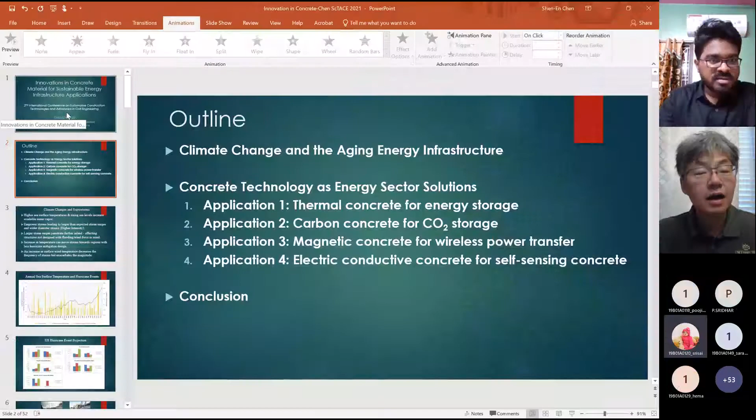I'm going to discuss some innovations in concrete material for energy infrastructure application. My inspiration for this conversation is really based upon my background in hurricane investigation, especially pertaining to some of the things that we've seen during the past 30 years on climate change, and also related to energy infrastructure responses. So I will be talking about what concrete technology we can apply to the energy sector. I will show 4 different applications, and then I'll conclude my presentation.

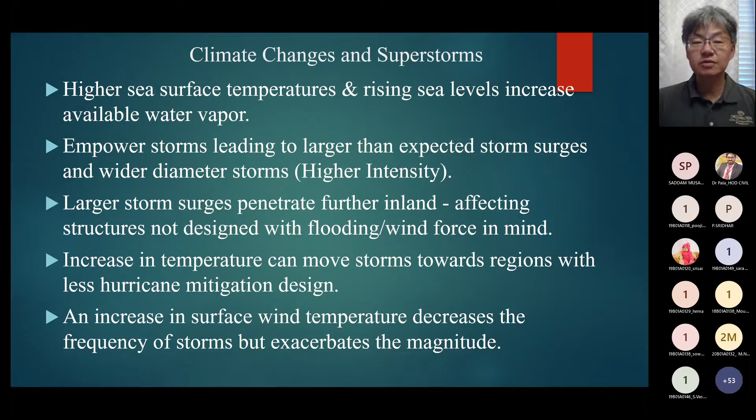One of the key results of climate change is extreme storm events, what we call superstorms. This is due to higher sea surface temperature and rising sea levels. As a result, there is an increase of the amount of water vapor in the air, which indicates that it will need more energy to move this amount of water vapor. And as a result, there will be bigger storms, with wider storm areas, higher intensities, and stronger storm surge, such as flooding of the coastal areas and wave actions. And these results would directly impact the structural design for all coastal and inland structures. And we have seen many of those examples.

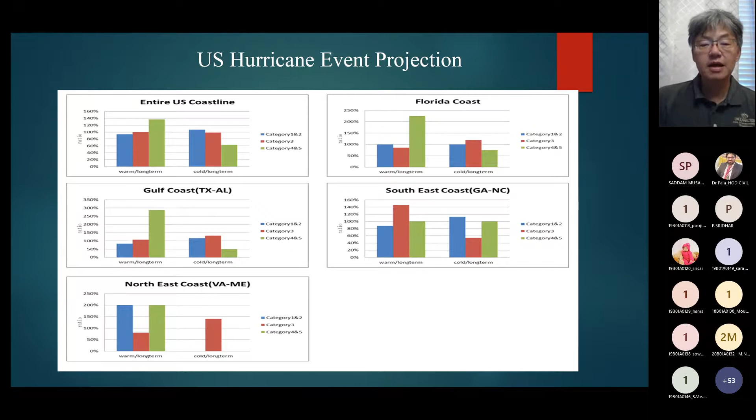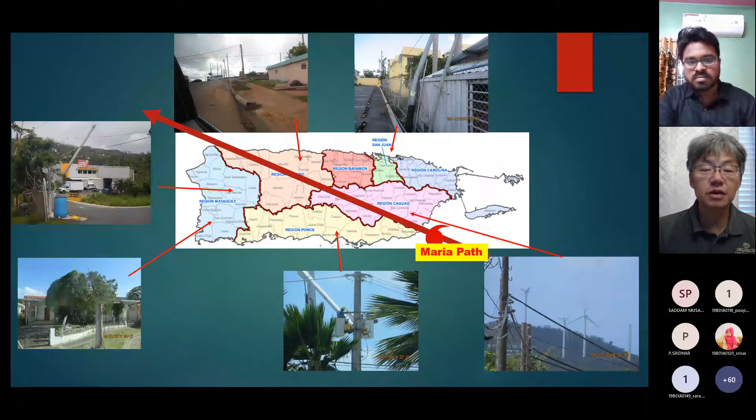The tropical storm that made landfall in Puerto Rico had 185 miles per hour wind. At such a high wind speed, the island was not prepared, so the entire island lost its power. What we have observed is a lot of critical energy infrastructure collapse, including substations, wind turbines, as well as different transmission structures. And here are several pole-shaped structural failures. As a result, as I mentioned, almost the entire island lost power.

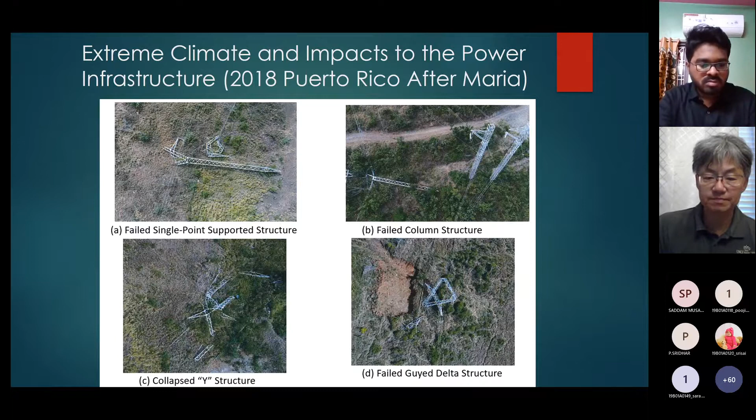Another inspiration for this study is really the use of concrete technology. So concrete is the most widely used construction material in the world. However, much of that concrete is aging, especially for the energy infrastructure. And so there is a new question about how we can improve on the concrete technology so that we can enhance the performance of those aging infrastructures.

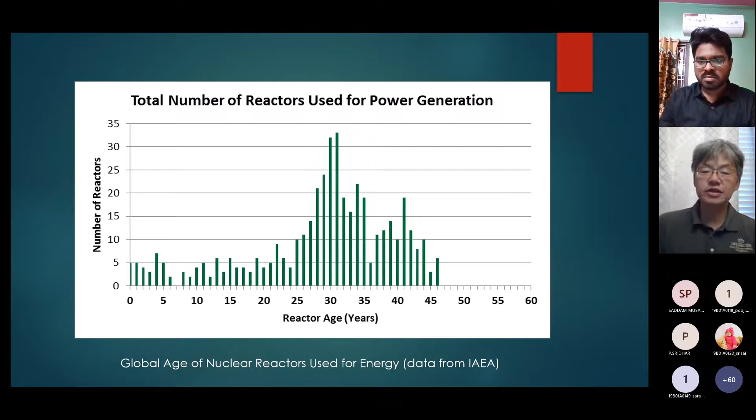This shows you the nuclear reactors used globally and their relative age. And this is a little older data; this was published in 2010. So all these ages will have to be pushed 10 years further. Again, it's an indication of the aging infrastructure. So we are asking the question, what can we do to improve the climate using concrete?

Now, concrete technology historically only applied to building structures. Okay, so even though we have high strength concrete, we have concrete with waste materials, the key is still focused on the building science. In this talk, we want to look at a totally different way of using concrete. So here I'm going to give you 4 examples.

First one is, can we use concrete for thermal energy storage? Okay, so when we have a storage capacity, then we are able to use renewable energy. Okay, so that would be one way to help the climate by transitioning from fossil energy use to using renewables, which are not storable at this point.

And the second technique that I'm going to present is, can we use concrete to absorb CO2 so that we can actively reduce the amount of carbon dioxide in the air, which would be helpful to the greenhouse gas problem. And then the next one is, can we modify concrete so that we can enhance wireless power transfer, which would help to promote electric vehicles?

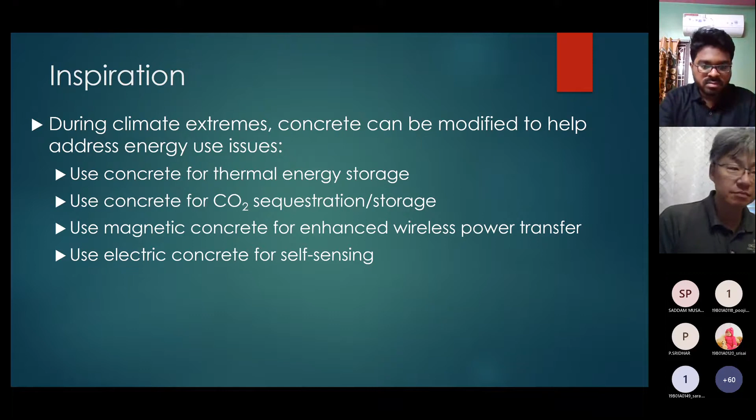Okay, so electric vehicles run on batteries and they don't have an emission problem, which is one of the best. They may still be dependent on fossil energy through the energy production. However, we can remove the emission problem away from the urban scenario, and hopefully that would help with, again, the climate issue. And lastly is to develop self-sensing concrete, which will make concrete more efficient as both building technology as well as energy storage technology. So those are the 4 examples I will present.

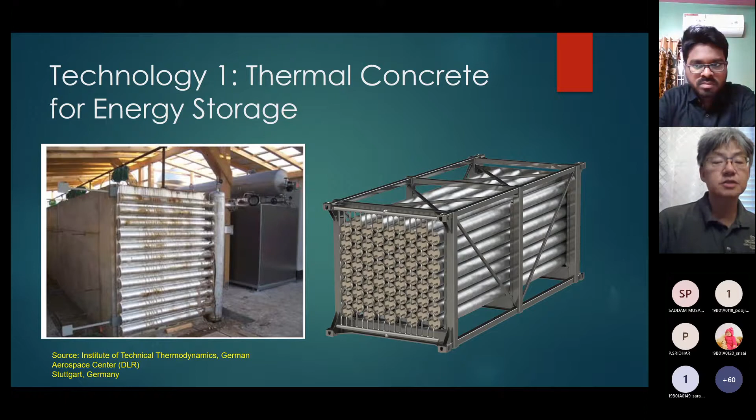So the first technology we'll present is the thermal concrete for energy storage. So mass concrete has a lot of material that, if we can heat it up, would store the energy that way. And here is a typical application where water is being used to transfer heat from building applications to those concrete masses. And so this is a technology that is growing in application.

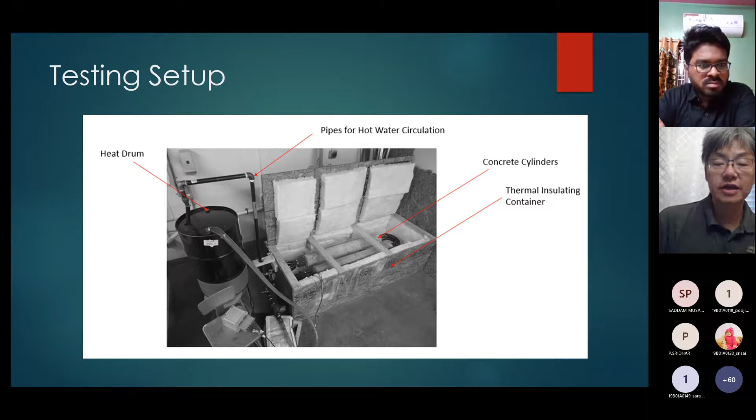We also use monitoring techniques such as thermocouples and electrodes, which make the concrete self-sensing. Okay, so I will talk about self-sensing at the end of the lecture, but this is where we are demonstrating this technology.

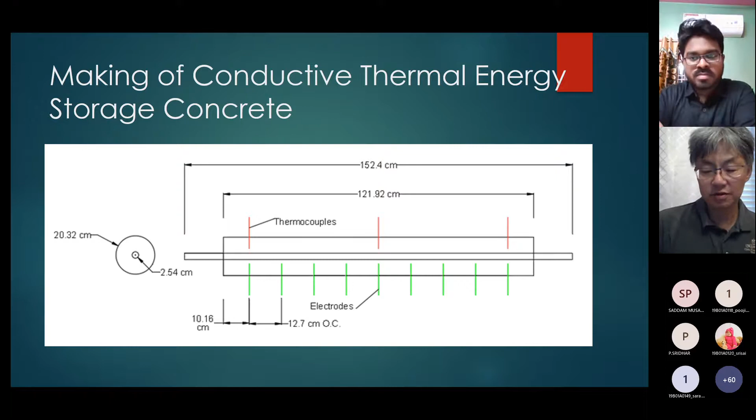Here is the concrete specimen that we put several sensors on, and then you can see when hot water goes through the cylinders, it heats up the material, and then we typically do the test by stopping the water flow so that the material can have its natural cooling down, so that we can quantify the conductivity of heat through the process. And this shows you the result of finite element and actual temperature increase during the heat-up process. So you can see that they match very well.

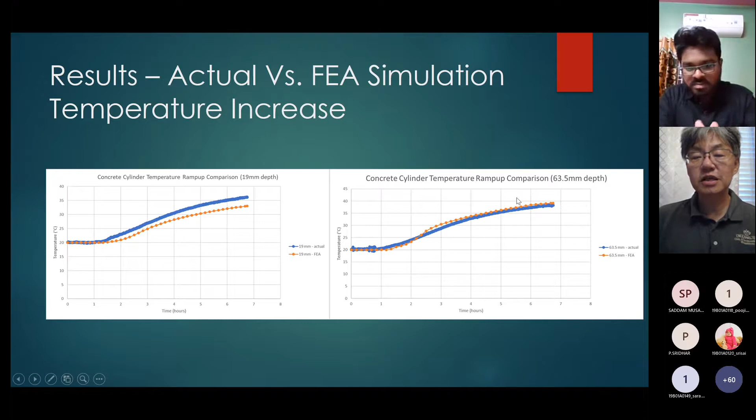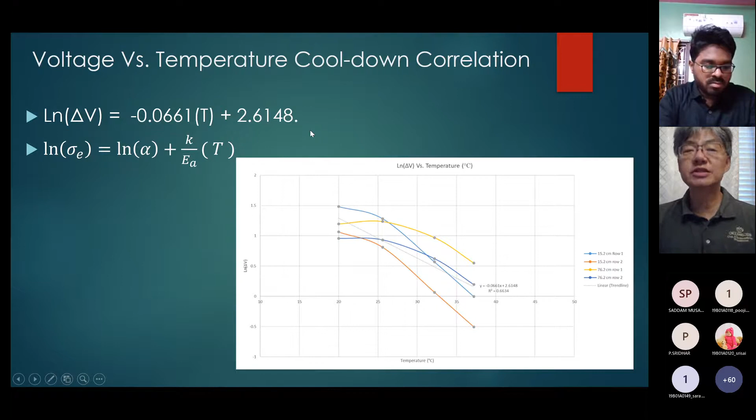So this is an inverse method of determining the heat conductivity of the concrete material. And this is a voltage. So we are using electrodes to measure the voltage drop during temperature cool down. And you can see that there is almost linear correlation with the cool down process, which can help us to develop correlations that can be used for the design of such technology.

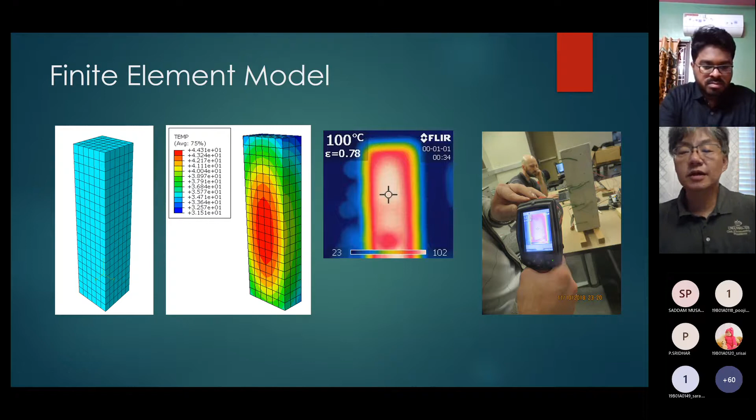To understand further how concrete material reacts to thermal effect, which is a multi-physical phenomenon, we use the electric self-sensing technique and the thermal measurement method on concrete specimens, which are built in the beam shape. And this is finite element and infrared imaging of the same specimen. So we can see there is a direct correlation between the theoretical model and the actual experiment.

And again, we demonstrate that both voltage and current can be correlated to the temperature change. And because voltage and current are the two sides of the equation, which directly relates to the resistivity of the material, we can also measure the resistivity as a function of the thermal property for those kinds of concrete. And the next application is CO2 storage through mineral carbonation.

So mineral carbonation is a natural weathering process of rock, especially rock with a high content of magnesium, iron, and calcium. And in literature, we have seen people propose to use olivine and serpentine as the potential feedstock for mineral carbonation so that we can reduce the greenhouse gas in the atmosphere. And the typical measure is if you have 2 tons of silicate mineral, then you can capture 1 ton of CO2.

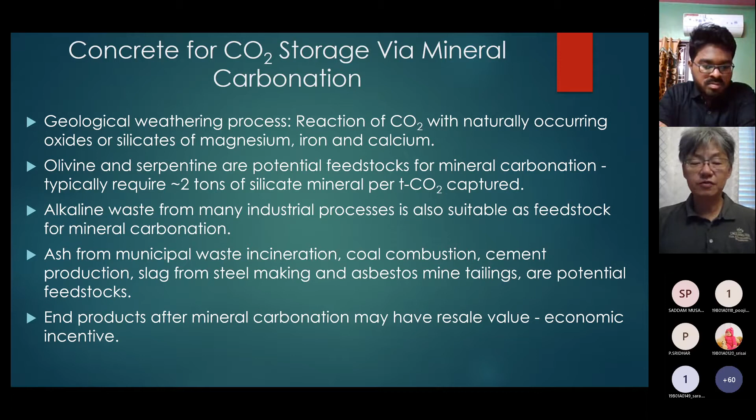And there are other industrial processes resulting in alkaline-based waste, which are also valuable feedstock for mineral carbonation. And then there are other waste materials such as incineration outputs, especially slags, and cement productions are potential feedstocks. And so we have imagined if we can use cement to increase the carbonation, then we can make concrete into a natural CO2-absorbing material so that it will clean up the air naturally. And this shows one of the techniques to increase the surface area for absorption is by making porous concrete.

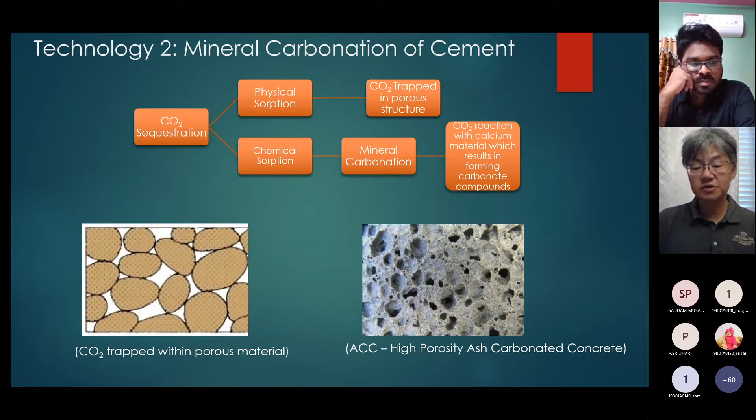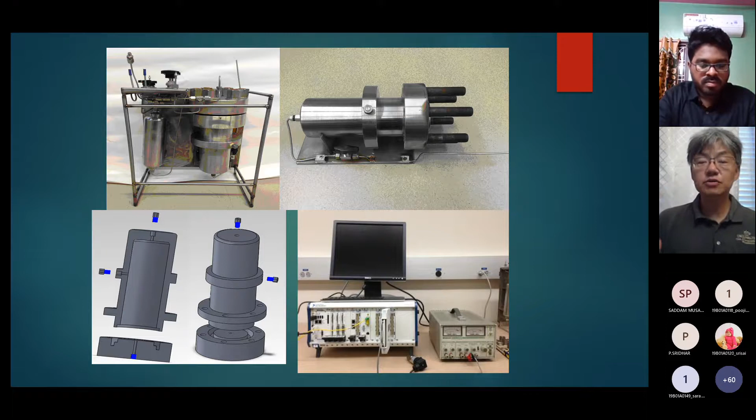And so to study such a thing, we had to come up with our own carbon absorption test device. So this is a schematic drawing of what we call the CTF PRC test chamber for absorption test. And the goal is to quantify how much CO2 we can absorb in different cement mix designs. And this is the actual device that we fabricated in our laboratory, which shows you a very high pressure chamber that we can apply high pressure CO2 into. And by monitoring the pressure drop, we can actually quantify the amount of volumetric loss of CO2 in the material mix.

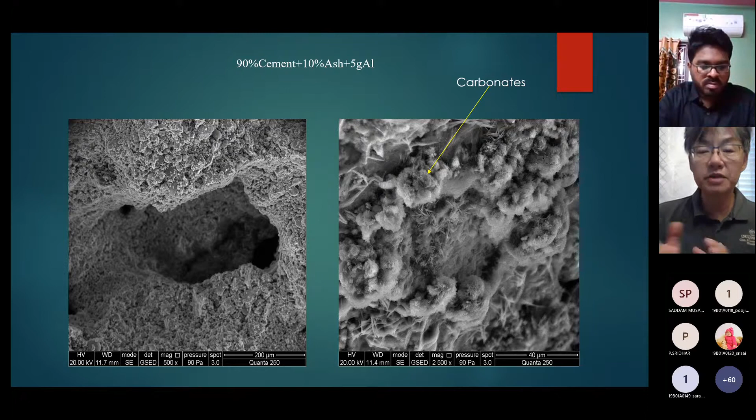And this is the outcome. This is the microscopic image of the carbonated concrete showing the actual carbonates that are being formed. And so this is the physical evidence that carbon concrete is able to absorb CO2 and permanently remove it from the air. And through experiments, we can see that within the first few hours, a significant amount of CO2 is being absorbed quickly. Concrete continues to age for 28 days, but within the first 2 days, over 15% of the CO2 per volume of the material can be absorbed.

And this is a significant result because it shows active absorption. And we can also further differentiate between physical absorption and chemical absorption. So chemical absorption happens when the material is still wet and the chemical reactions result in the carbonation of calcium material producing calcium carbonates. And physical absorption is due to the porous volume. And so pressurization would force CO2 to further go into the pores of the material and result in the absorption process.

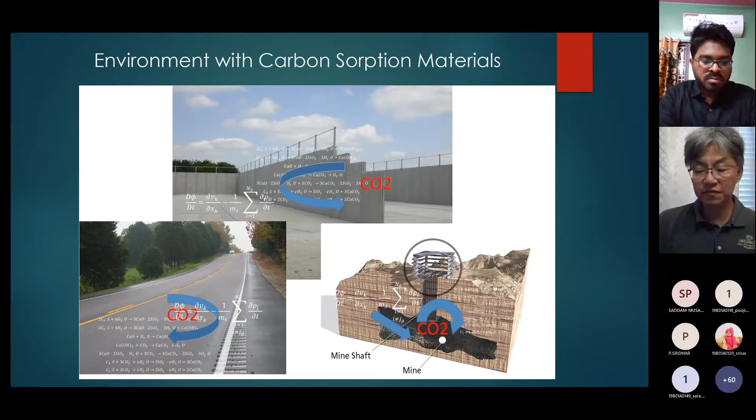What is the application? It's everywhere. It's concrete roads, concrete buildings, anywhere that you can imagine the use of concrete, you can imagine carbon absorption. So this is a really, really cool technology. And we are hoping that the world will catch on to the study of carbon concrete so that we can actively reduce CO2 in the world. The next technology we want to show for the use of concrete for climate improvement is to use magnetic concrete for wireless power transfer.

Electric vehicles are zero emission technology based on lithium ion batteries. All you have to do is charge them overnight so that you will have power to be mobilized. Wireless power charging is a cool technology because it can help reduce the actual plug-in into the system, and also it can be made dynamic so you can charge a car while it's driving.

It's based on a very simple principle that was originally developed by Tesla for wireless power charging, based upon the principle of electromagnetic field generated by two different magnetic coils. Through the interaction of the two, there is a conversion of magnetic field and induced magnetic field on the receiver side, which can transfer the electromagnetic field into electricity through the power electronics. So this coupling system makes a very efficient energy transfer technique.

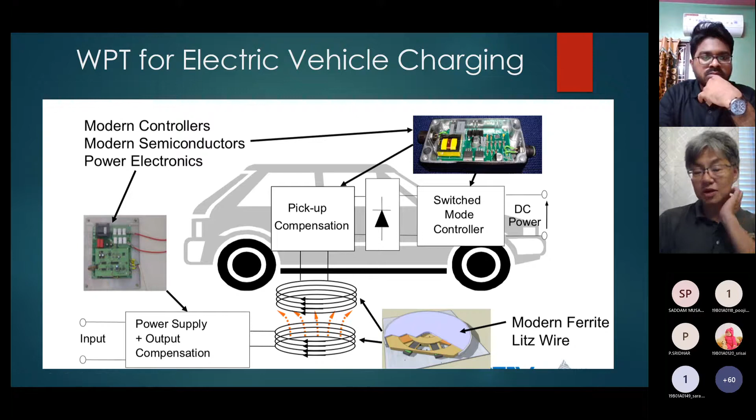This is great for EVs because you can imagine cars just parked on top of the wire. As long as the car itself has the wireless receiver on its end, the car can be charged for however long.

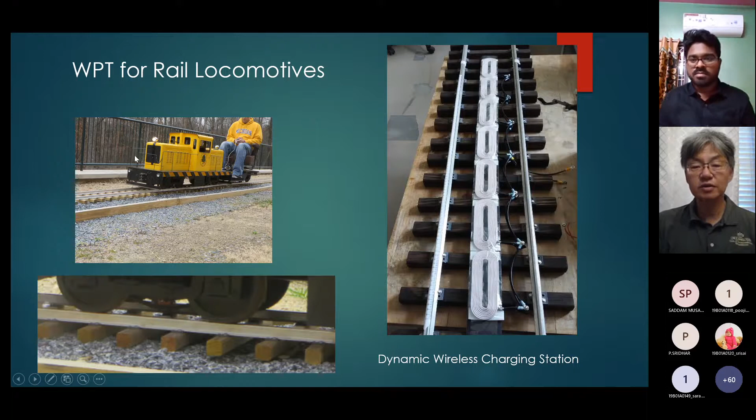This is our laboratory train. We actually have a train in our lab. It's a rideable park gauge train as seen in the top picture here. We are developing a technique that would make this train use wireless power transfer, and we have several designs. This is seen as a two coil system that can transfer electricity to this electric locomotive.

We are also developing techniques so that we can charge them dynamically. Here you see 4 transmitters and 1 receiver. The receiver is put on top of the locomotive, and using 4 transmitters, we can move the train and transfer electricity at the same time.

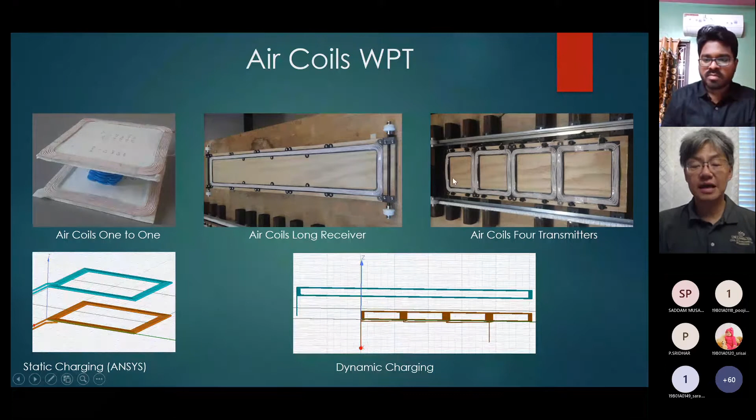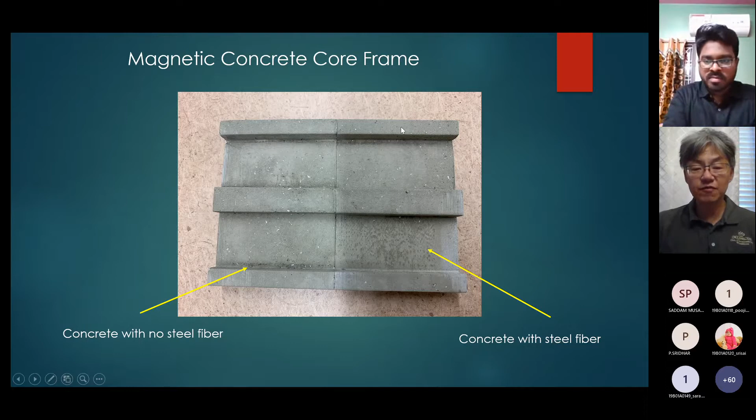Next, we're going to increase the efficiency of the power transfer by placing the coil on a concrete core material. We make the concrete core material magnetized by putting steel fibers in the concrete.

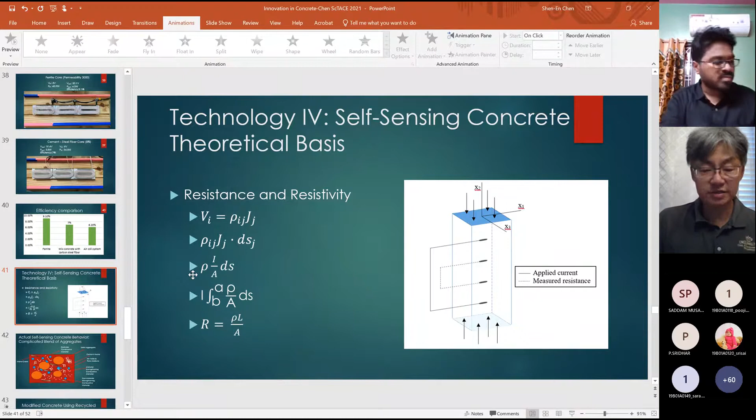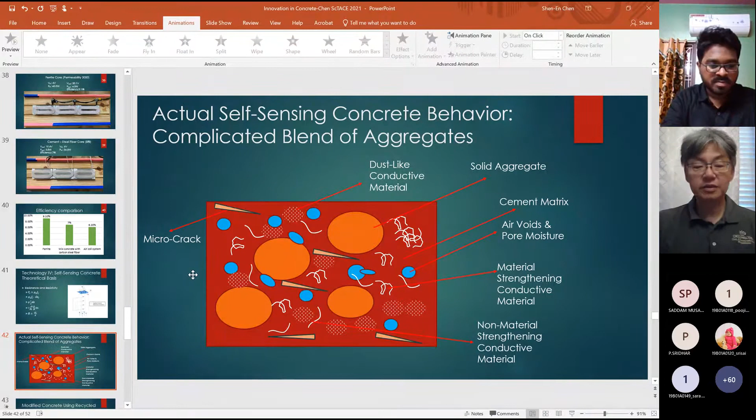We show that there is a reduction of resistivity when the concrete materials are being compressed, showing that there is a direct correlation. It is also a function of the maturity of the concrete material, so again we demonstrate the viability of such a technique.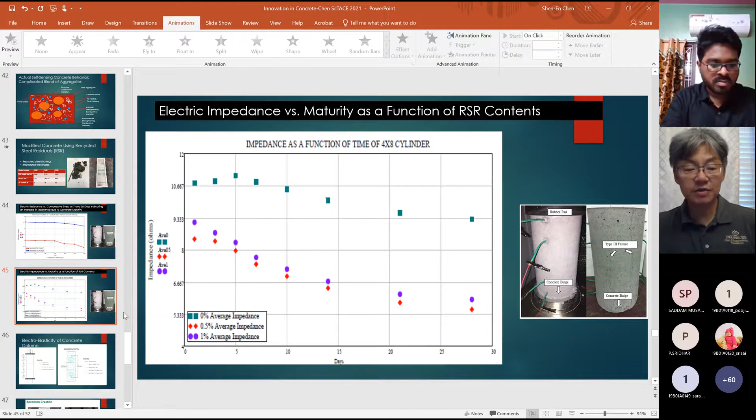Then we start testing using a load test on a concrete beam or column, in this case, where you can see that the electric current is being induced into the material. When the load is compressed, we can correlate the voltage drop versus the change in current.

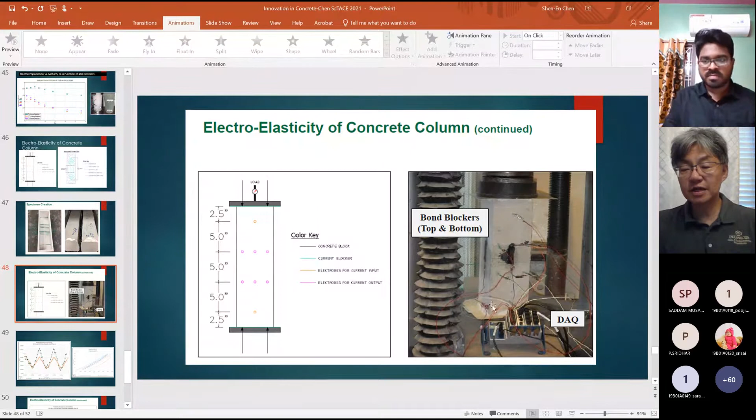Here's again the picture of the samples that are being built, and here's the load test setup. You can see that we have both strain gauge as well as voltage measurements across the specimen.

This is really the neat picture. We do loading and unloading cycles, and you can see the strain gauge and the resistivity voltage measurements are compatible, which shows us that there is a linearity in the voltage drop versus the stress-strain relationship of the material. So this shows you the stress-strain curve.

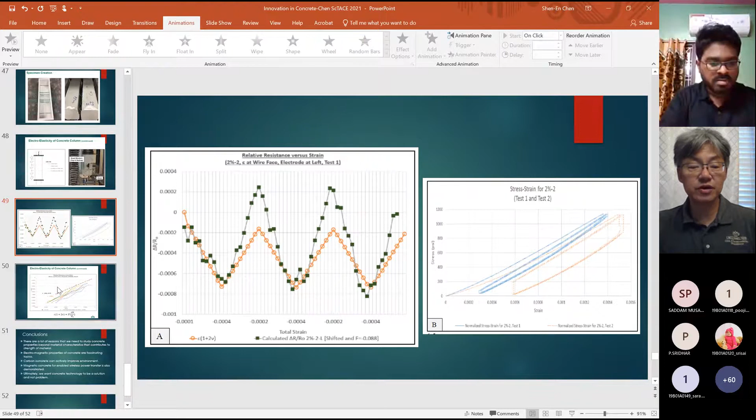Based on that, we are able to make correlations between the electric resistivity, which has to be derived, versus the strain of the material.

So in conclusion, there are a lot of reasons why we wanted to make concrete material applicable to help with climate change.

One of the reasons is because every ton of cement produced will generate about one ton of CO2 emitted into the atmosphere, because cement is produced in a kiln, so it needs to be heated, and that heating process generates CO2. There are Norwegian studies showing that concrete within 100 years would naturally absorb the CO2 that it produced initially.

However, to improve that process, we can make carbon concrete, which can actively absorb CO2 from the air. Imagine if all the concrete we produce for building materials could actively absorb CO2 - then we are building an environment cleaner than ever. We can actually make an urban forest equivalent to a natural forest that absorbs CO2 naturally.

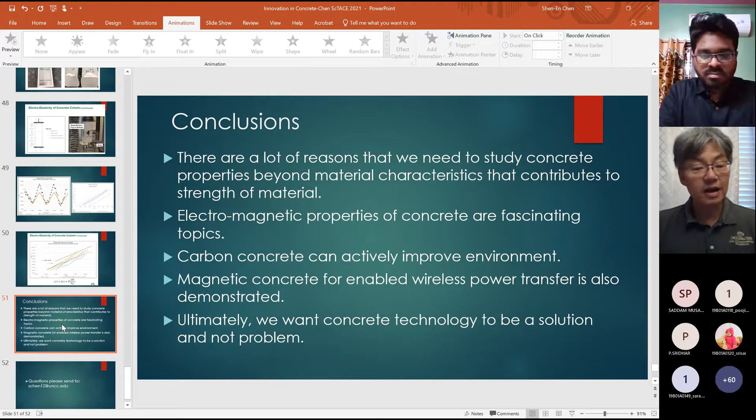So concrete is a material that has a lot of potential in improving our energy infrastructure, and you just need to have more research done. That's all the material that I have.

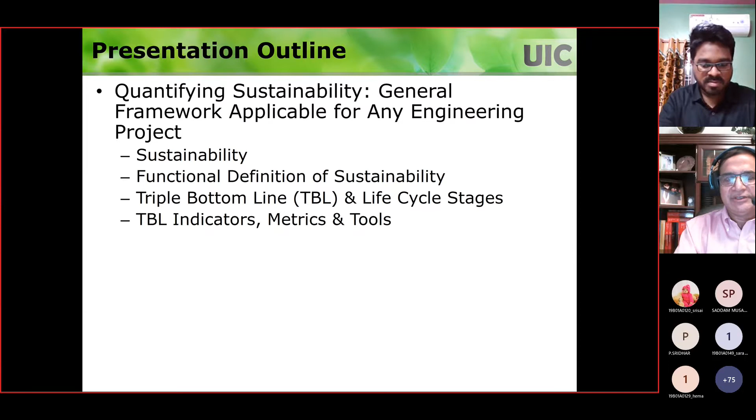In my presentation, I'm going to show the methodology to quantify sustainability. A lot of people talk about sustainability, but we need to quantify and really see whether you are achieving sustainability or not. So I developed a framework, and I'm going to explain that. Before that, I'll explain what sustainability is - the functional definition of sustainability, triple bottom line, and life cycle stages. These are things you really need to know if you want to understand sustainability and how to quantify it - triple bottom line indicators, metrics, and tools, and then integrated assessment. Then I'm going to demonstrate how this methodology can be used.

I know the conference covers all topics in civil engineering, so I wanted to choose something that can benefit everyone. The methodology is applicable in every field of civil engineering, but this case study may be more focused on a particular field. And just some closing comments. So let me first talk about this quantitative sustainability assessment.

Let's think about the big problem we are dealing with. We have been doing civil engineering projects for many years, based on code or regulatory requirements. If you are designing a concrete structure, steel structure, or foundation, we always look for codal and regulatory requirements. We make sure we do the technical analysis and design so that the system is safe, easy to construct, costs less, and doesn't take too much time to construct - those are all good things.

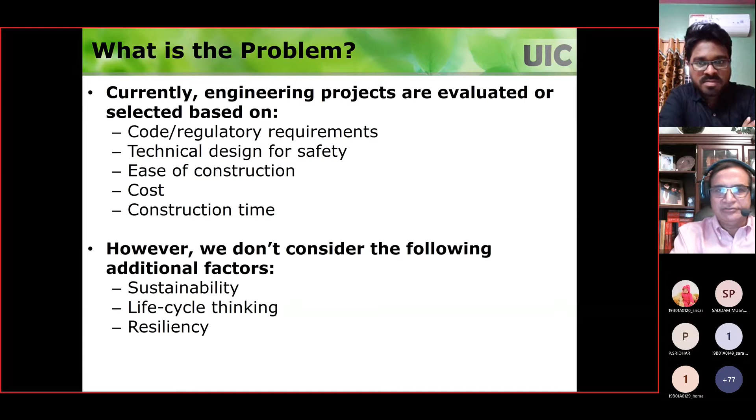But we don't consider additional factors which are becoming extremely important these days. The first is sustainability, the second is life cycle thinking, and the third is resiliency. If you think about these things in addition to whatever we do conventionally, we can actually develop very innovative solutions that are not only effective, but also economical. This brings us to what sustainability is, what life cycle thinking is, what resiliency is - these are new concepts that all civil engineering professionals, students, researchers, and faculty should be aware of.

That brings us to why we need to worry about this. We didn't talk about sustainability 10 years ago - now everybody is talking about it. Why are we talking about sustainability so much more these days? One of the main reasons is global climate change due to greenhouse gas emissions - carbon dioxide, methane, and a few other gases, but mainly carbon dioxide and methane. We are emitting so much of that, causing a global warming effect, which is causing a lot of problems - sea level rise, floods, droughts, wildfires. So many wild things are happening, and that is affecting the current generation as well as future generations.

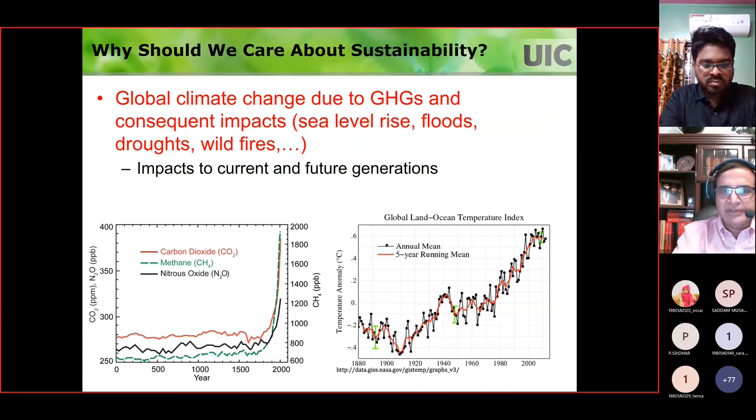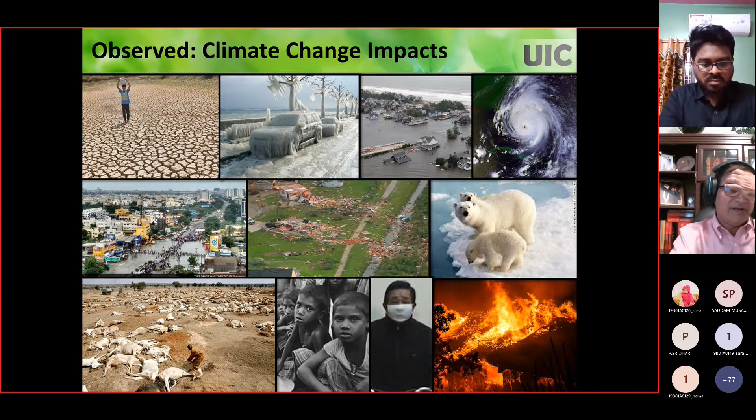So this, again, is not a fiction. These climate change impacts are happening. So greenhouse gases are being emitted into the atmosphere resulting in global warming, and it is leading to all kinds of these problems. And these problems are not uniform across the planet. In some places it's drought, some places a lot of snow, a lot of flooding in some areas, tornadoes, and a lot of places wildfires, air pollution, and so forth. So these are all being witnessed now.

I mean, in India, we are hearing about this flooding much more than what we used to hear before, right? And before it used to be, it's going to rain heavily, and then it's going to go away, and we didn't have any problems. But these days we are seeing a lot of these problems in India. I just got some pictures showing that, and some places it's too dry too. So there's a lot of information about the potential impacts of climate change.

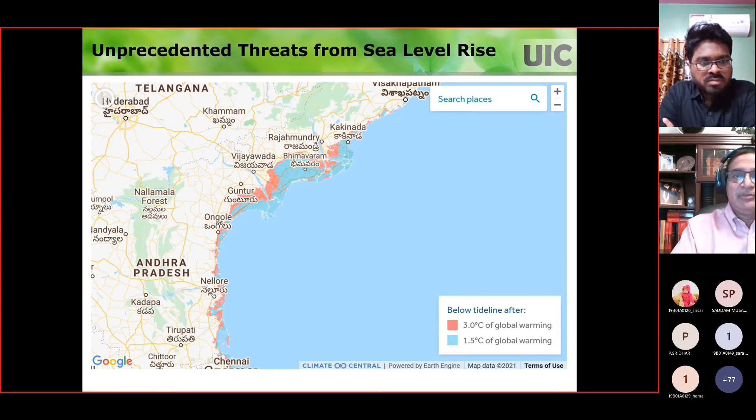So as you see here, Bhimavaram is going to be in big trouble if you don't address the global warming issue. If I'm living in Bhimavaram, I really need to worry about it. So I just took a close-up view of that. You can see Bhimavaram and other cities that are going to be totally underwater if this global warming is not addressed. So again, this is the more close-up view of it.

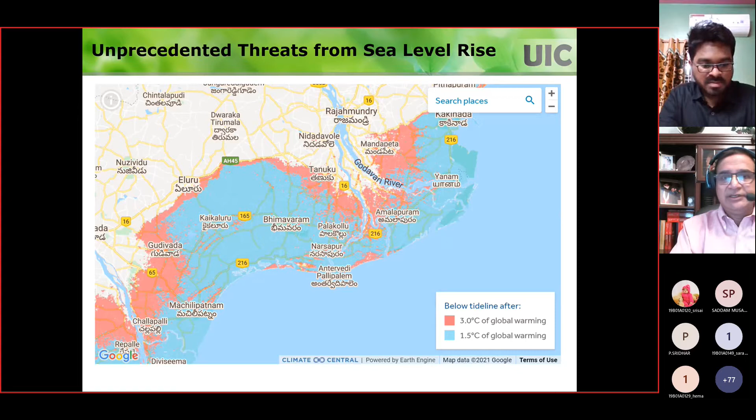So all of you who are in Bhimavaram, you have a reason to think about this issue and a reason to worry about the future. So that's what makes it much more critical, especially you are vulnerable to these impacts in the future. So this could be happening, the predictions are uncertain, but depending upon what we do now, if we don't do anything, obviously global warming is going to happen. We're going to have 1.5 and then eventually 3 degrees, and then we have to face all these problems. So you can see how important it is to address these climate change impacts.

Now, in addition to climate change, we have another big issue. That issue is exploding population growth and consequent impacts. So the population is increasing at an alarming rate too. So if you look at the 1970s, 1960s, you have 3.5 billion people. Now we have close to 8 billion people, and it's expected to increase more. So what is the problem, right? If you have more people, you have more demand for everything, right?

So then you're going to use a lot of these natural resources, and you're going to deplete those natural resources very quickly. And everyone throws away stuff. So you have increased waste generation, increased pollution, air pollution, water pollution, all kinds of things. And the damage to ecosystem, people are destroying the forests, green fields, building, all kinds of things. That's not good. Loss of biodiversity. Biodiversity is extremely critical. Some of the things are becoming extinct.

Urban sprawl. You probably have seen the city where you live in. It used to be very small before. Now it's so big, and that causes a lot of issues. And the economic disparities. People who are poor, they are remaining poor, and people who are rich, they are becoming very rich. So the gap is increasing tremendously. And the social injustice. People who don't have voice or power, they are being suppressed significantly. So these issues are becoming more and more.

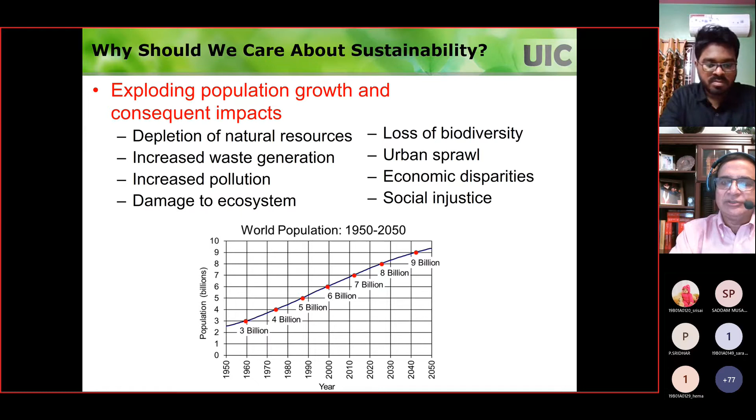And as you see, not only climate change, this is the increased population. We cannot do much about it, but we need to think about creative ways to accommodate more people on this planet without causing these huge impacts. So that really worries everyone. I mean, people who believe in these kind of issues or who address these issues, they are really perplexed in terms of what should be done, right? So, this is a huge concern.

So people are working on it, people are not giving up. People are working on addressing these issues and be sustainable into the future. So the sustainability projects are being done at different levels. So global level, like climate pacts, like the Paris Agreement, those kind of things are happening at a global level. Even at the national level, India is doing some of the policies towards sustainability.

For example, energy: the Indian government is proposing a lot of renewable energy. At the regional scale you can also do it. For example, if you look at the whole watershed, what can be addressed, what can be done, or at the business or industrial scale. For example, in your college, what kind of things you can do, what you can think about.

And lastly, this is something that can be done by every engineer, like a civil engineer. As a civil engineer, no matter what your specialization is, we are going to use materials, we're going to design certain things, products and systems. So why not think about sustainability in the things that we do on a day-to-day basis? It doesn't matter if you are in transportation, structures, geotech, environmental, whatever it is. In all of these things, we have to look through the lens of sustainability, which we were not trained to do in the past.

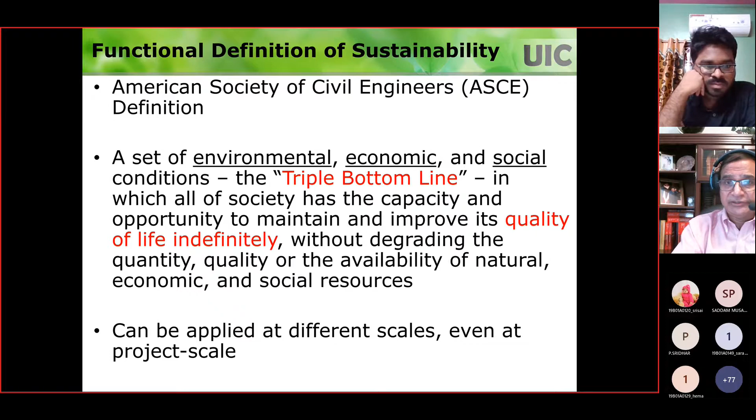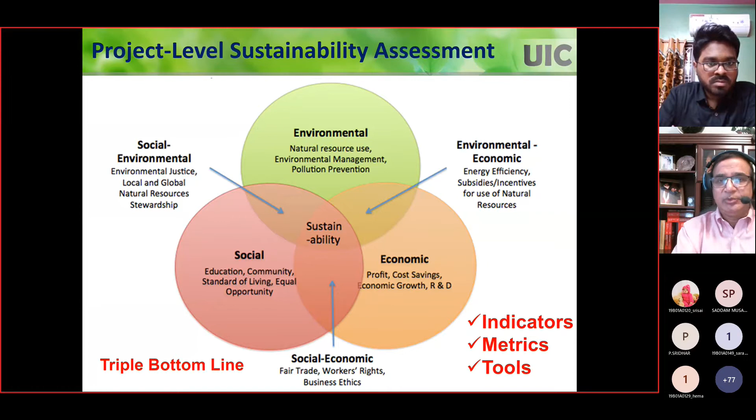This concept of the triple bottom line can be applied at different scales, even at the project scale. So this provides a functional definition. Basically, we can take this definition and do something to make a difference for sustainability. You must have seen this Venn diagram. Whenever people talk about sustainability, they show this diagram. So in addition to all the things that we do now, we need to subject our designs to these considerations. What are the broader environmental impacts? What are the broader economic impacts? What are the social impacts? So we really need to think about indicators, metrics, and tools for these triple bottom line aspects, and then see if our design is sustainable or not, right?

Here we have three things: environmental sustainability, that's mostly talked about, but there are also economic sustainability and social sustainability. When you talk about environmental sustainability, you're talking about how much energy, carbon footprint, smog, acidification. These are all the broader environmental impacts that you want to look at. These are indicators, and you should be able to quantify these numbers for any given project, and you need to have tools to calculate these things. If you have these tools, you can look at how environmentally sustainable your design is.

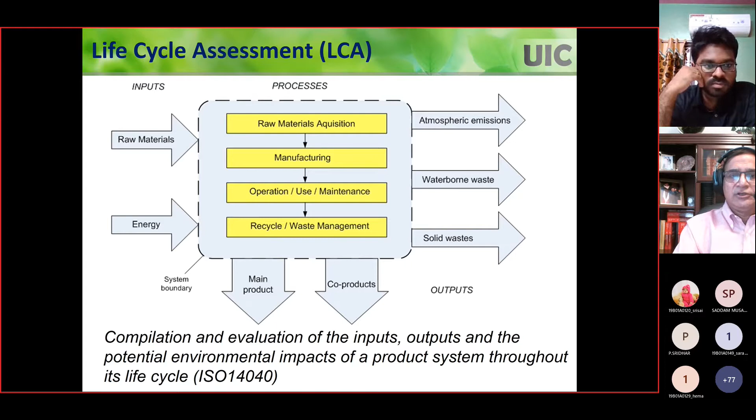One of the common techniques used for environmental sustainability is called life cycle assessment, LCA. It's a standardized ISO 14040 method. You have inputs, and you look at all the life cycle stages. You have outputs, and those outputs are basically your environmental impacts. There are a standard four phases of an LCA: you need to define the goal and scope, then the life cycle inventory, life cycle impact assessment, and then the interpretation. We teach this methodology in our courses, and we have our students do some projects based on this.

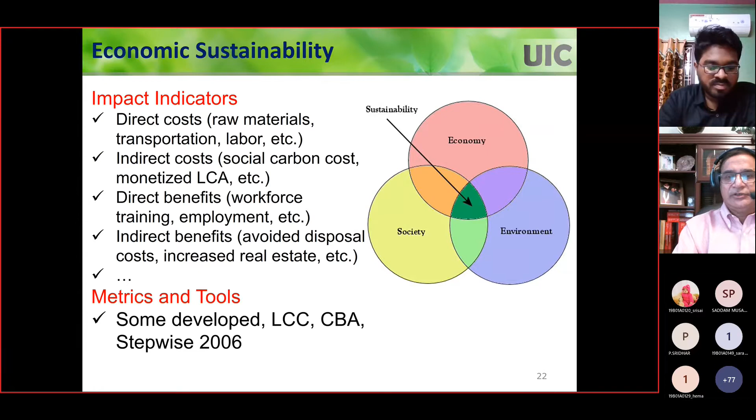On economic sustainability, there are direct costs. A lot of our civil engineering students learn how to do the cost estimate. That's only one part of it. We need to learn about these other things: indirect costs, direct benefits, indirect benefits, and monetizing those aspects in our economic analysis. There are some tools developed for this, and more tools are being developed as we speak. This is the part that civil engineers are not very comfortable with. So we need to work with economists, or we need to use the tools that are being specifically developed for civil engineering applications.

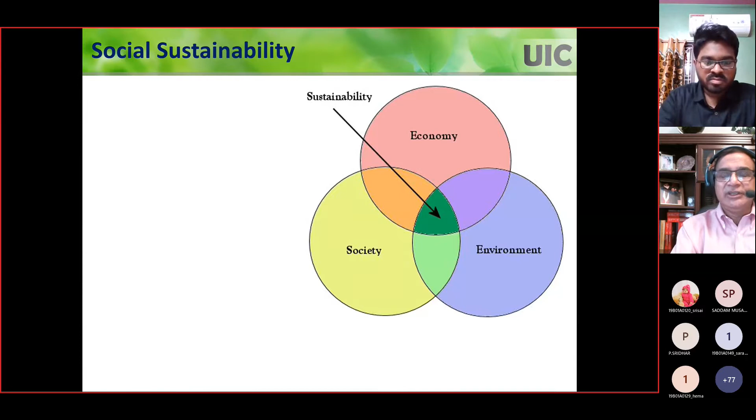The other one is social sustainability. This is basically, whatever we do, how the community is going to be affected, how the people are going to be affected. Civil engineers are very bad at addressing these issues. We just think about something, design it, implement it, and think the people around that area will like it and use it. But that's not the case. You really need to bring people on board and make sure that they are part of your team, and they can provide comments and suggestions on what can be done so that their lives can be improved. So there are many factors to think about in how your project could help people, right?

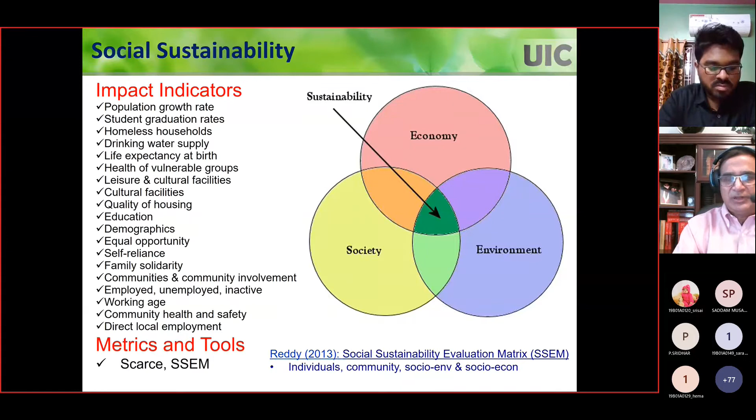So these are some of the indicators. And then how do you quantify these? That's a huge problem. There are no tools, but some tools are being developed. For example, I developed a tool called SSEM recently, kind of a rating tool, but it's better than nothing. But these tools are being developed more on these things.

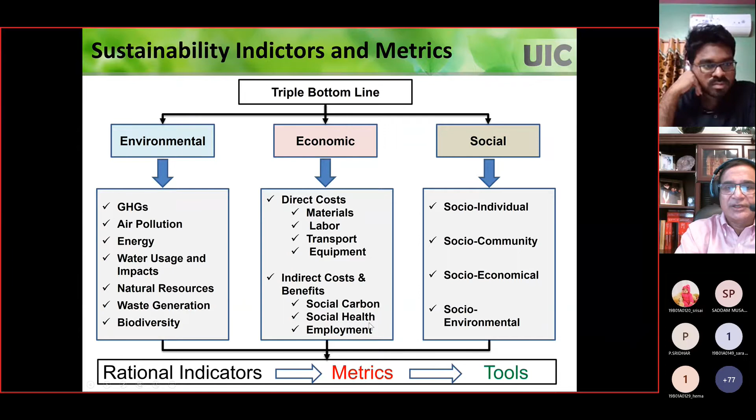So what we have to think about is, when you talk about sustainability, we need to think about the triple bottom line. So environmental aspects, these are all the indicators, and economic aspects, these are all the indicators. Social aspects, these are all the indicators. I hope you can see my cursor. And then once you have those indicators, we should have tools to calculate those metrics, okay? And then once you have the metrics, you should be able to decide whether your design is sustainable or not.

The other thing that civil engineers don't really understand is life cycle thinking. A lot of times, we think that materials are going to magically appear at the site, and we construct it, and then we use it. That's what civil engineers do. But actually, we need to think about the life cycle of a project. So you need to look at going back to mining, what kind of resources are mined and how the materials are manufactured, for example, cement, steel, whatever it is, and the transportation, what kind of things are involved during construction, during maintenance, and also end of life. It could be 50 years, 100 years, whatever the design life is.

At the end of the design life, what are you going to do with the materials that you're going to demolish, right? That needs to be thought about right up front, so that most of the materials that you use could be recyclable. If you don't think about that, most of the things have to be dumped somewhere. So that's not good. So we need to think about these life cycle stages, and you want to consider the impacts at each life cycle stage and add them together. So this is very important. So that's what I did. These are all the life cycle stages, and then you apply the triple bottom line aspects and combine all those aspects.

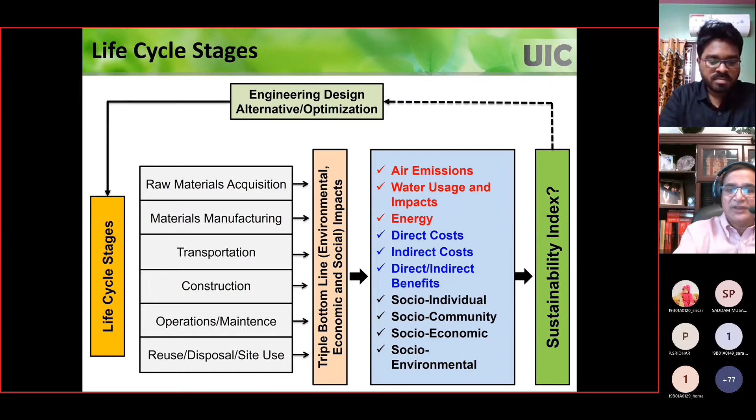Now the question is, you have these multiple indicators with metrics, and sometimes they're conflicting. If you have two options, you're not going to see one option consistently having better results than the other. Or even if you have one option, how do I calculate the sustainability index? Can I combine all these factors to come up with a sustainability index? So that's where we developed this tool called MIVES. I don't have time to go over it in detail, but basically we look at different alternatives, then the requirements, criteria, indicators, assign the weights if needed, calculate each indicator and the value function, and then determine the sustainability index.

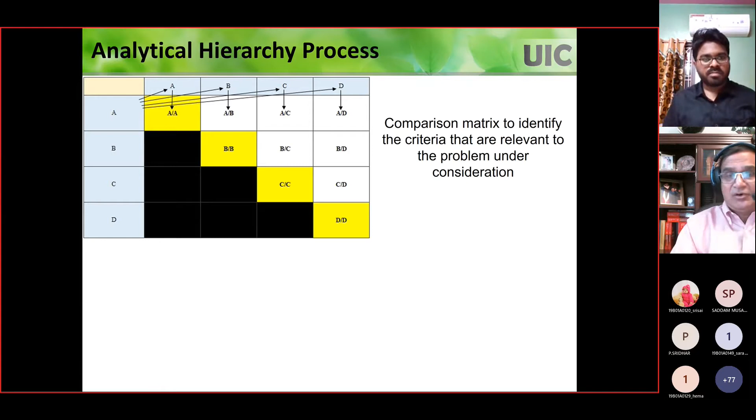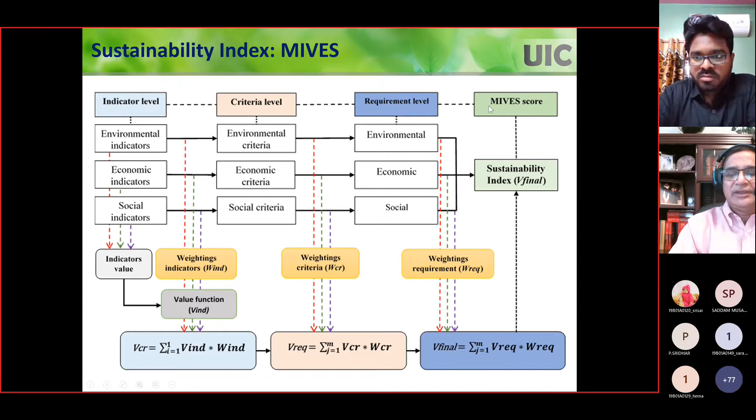One of the important things is you have so many indicators. You may consider all of them equal, or sometimes some are more important than others. So we use the analytical hierarchy process to come up with the weightages. Finally, you have all the indicators, environmental, economic, social, the criteria, environmental, economic, social, and the requirements. Combining all these things, we can calculate the sustainability index. We're calling this a framework, MIVES. If you want more information, look at this reference. If you need it, just send me an email, and I will be happy to mail it to you.

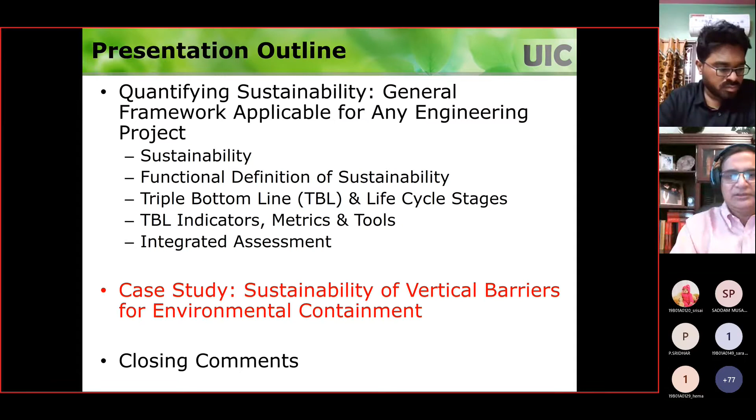This framework can be applied to any project that you are working with, transportation, environmental, structures. But I want to show you one example. This is a project where we needed to construct a vertical barrier to contain the contamination coming from the dump site. A lot of toxic chemicals are being released, and you don't want that spreading into the environment. So you need a vertical barrier that does not allow this contamination to spread out.

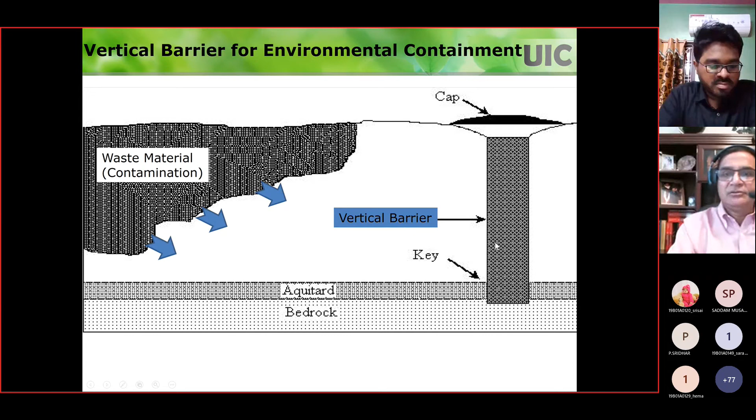For these vertical barriers, different barriers are possible. One of them is called a slurry trench soil bentonite cutoff wall. Here you basically dig a trench under slurry, and then you backfill with soil that is mixed with the slurry. That's called backfill. So basically you're taking out the existing soil and backfilling with a low permeable soil.

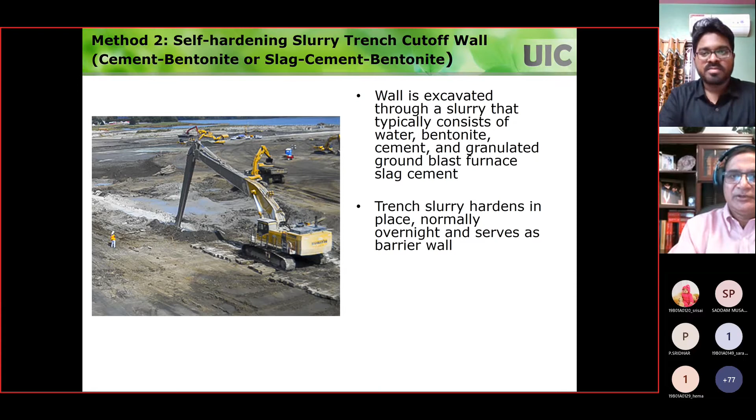So that becomes a low permeable vertical barrier. That's one way. There could be another way. They excavate it, and instead of backfilling with the soil, they backfill with a mix of water, bentonite, and blast furnace slag. Once you put it in there, it will harden in place. So you don't have to backfill with a soil that is amended with bentonite like you have done in the first method. So this is another option. This is also used commonly.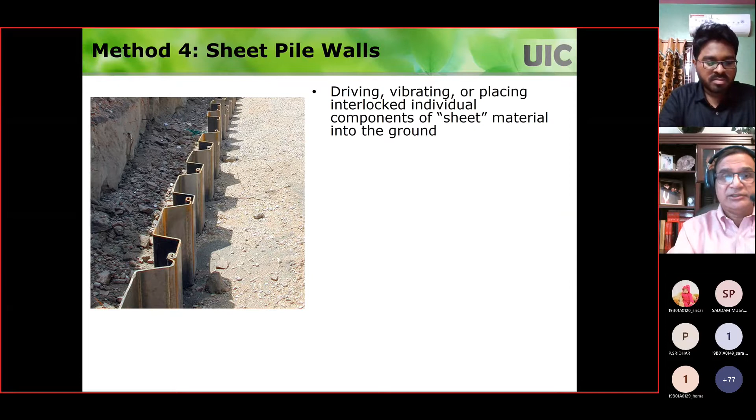And then a third option is soil mixed walls. Basically, you use some cementitious agent, most of the time Portland cement, and you mix it into the ground, and then that becomes a barrier. This can also be used for constructing that barrier. The other way is the sheet pile wall. You drive these sheet piles into the ground, and you are making the vertical barrier. So these are the four cases that we have.

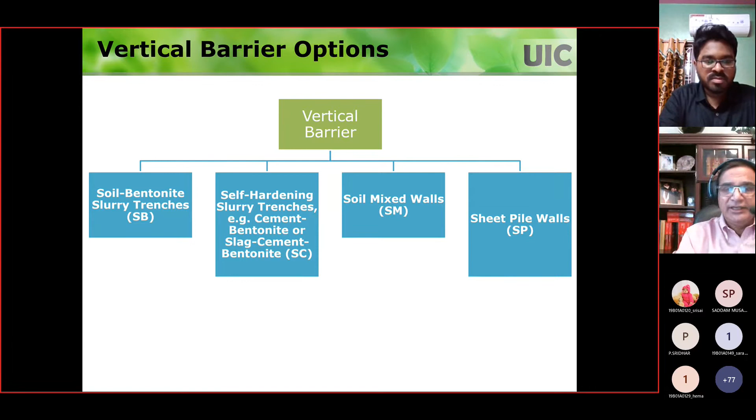So you have soil bentonite slurry trench as SB, cement-based SC, soil mixed wall SM, and sheet pile wall SP. Now, all these can serve the function, right? So which method is sustainable? We can argue about it, but we will never reach a consensus. That's why you need a quantitative framework to calculate the sustainability metrics, which will help you answer the question, and people will not have any argument about it.

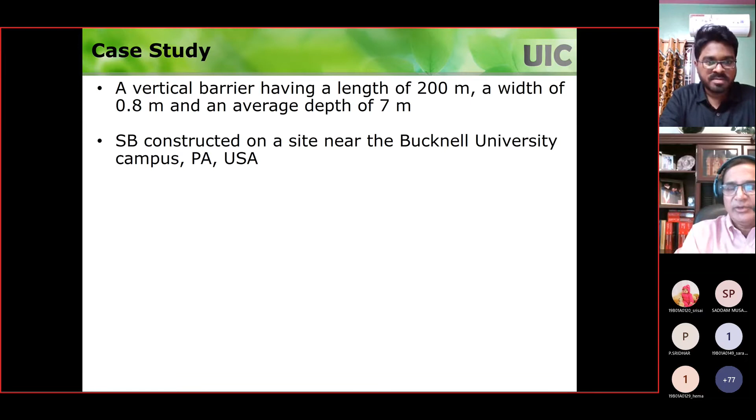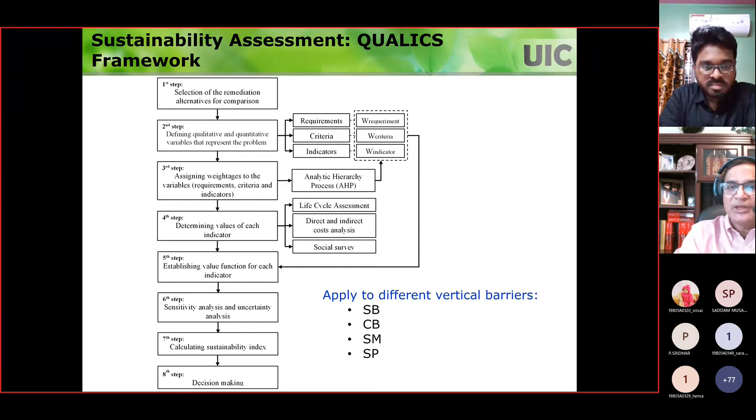Now what we're trying to figure out is which one is more sustainable, which one we should recommend to be used. For each case, you need to look at what the construction involves: site overhead, mobilization, site setup, mixing slurry, excavation, backfilling. Some steps are applicable only for particular types of barriers. For each step, what equipment and materials you need. You input this information to life cycle assessment, using software such as SimaPro, and you get these environmental impacts.

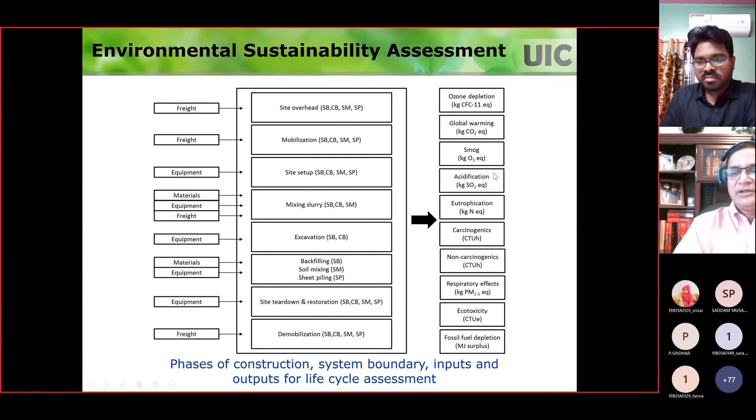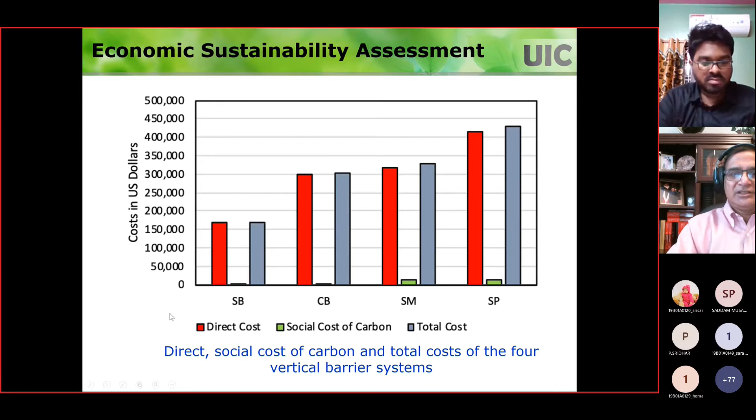So that's the environmental aspects, and now we look at the economic aspects. You have a direct cost, and then externality costs, like monetized environmental costs, and the total costs. A lot of other things could be included, but we just use the social cost of carbon as the monetized environmental cost. As you see here, SB has the lowest cost, and SP has the highest cost. Now the other assessment is the social sustainability, right?

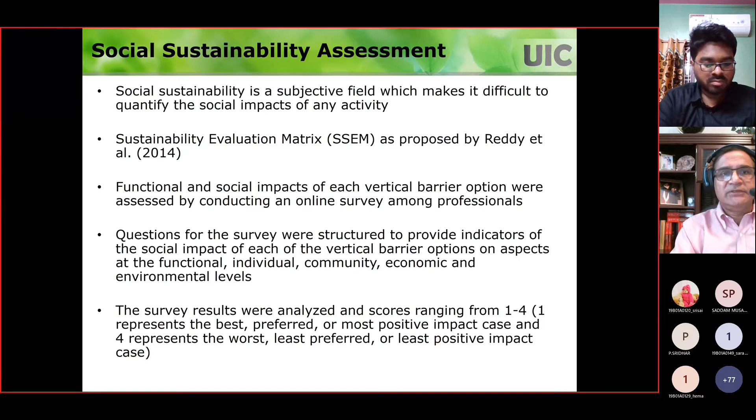So you need to really look at how this wall is going to affect the people. So there's a methodology, as I mentioned, the social sustainability evaluation matrix that I developed some years ago. And basically what it involves is looking at the functional indicators, and then social individual, how people are going to be affected, how the community is going to be affected, how the socio-economic situation is going to be affected, how the community level environmental conditions are going to be affected.

So these indicators you need to define based on the project, based on the situation, and then you do a survey of the stakeholders, people who are working, experts, policymakers and others. So you send a survey and get the responses, and then see, based on those responses, what people prefer, right? So you can analyze that data based on this.

So you are taking into account the impacts of your project on the individuals living in that area and the community that is living in that area, how the community and economic conditions are going to be affected, and how the environmental conditions are going to be affected. So these are the things which are very important. Ultimately, civil engineering is a profession serving the people, and you need to consider how the people are being served by your project.

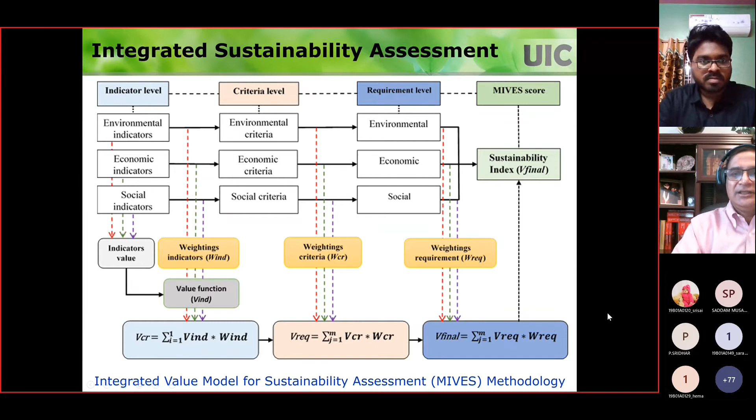So again, this is the methodology I showed you before, and we use all those environmental indicators, economic indicators, social indicators, and we apply these weighting factors if needed, and then ultimately we come up with a sustainability index. So once we calculate the overall sustainability index, considering all the triple bottom line aspects, the higher the sustainability index, the better it is.

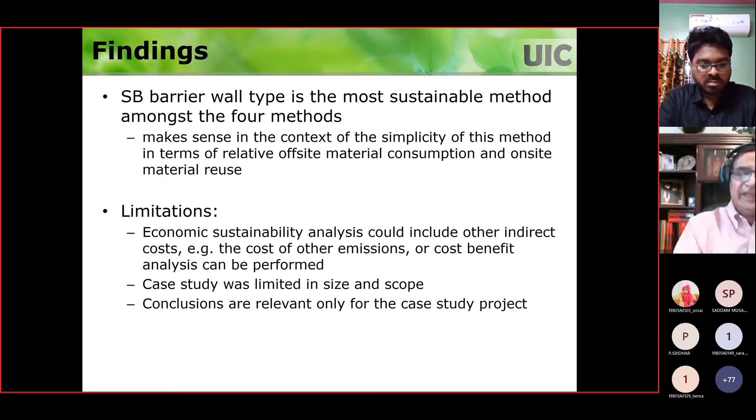So based on this analysis, this is the final result you get from the framework. Here I have 4 options, and based on my quantitative framework, I can definitely say that the SB system is going to be more sustainable. So this is the kind of conclusion you can get. But one thing I want to warn you is that this conclusion may not be valid in general. So you really have to look at site-specific conditions. The sustainability assessments have to be done for every project that you're dealing with. So that's the caution I am making.

So if you want more information about this example, this is the paper that you should take a look at. And I will be happy to email it to you if you want, or you can go to my website and find it.

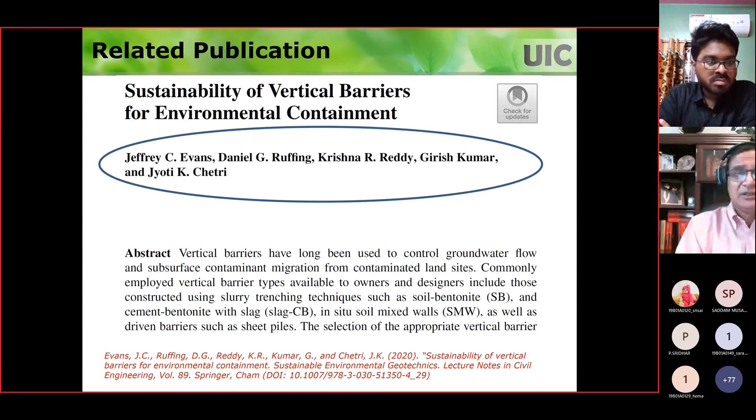So this is my last slide. I want to just mention that we should be thinking about life cycle sustainability assessment in our design work, no matter what we are doing in civil engineering. That provides the rational basis to assess which one is more sustainable. And LCA, life cycle assessment, we are teaching in our undergraduate and graduate level classes. That is a good tool for assessing environmental sustainability. But more could be done on life cycle economic and social sustainability aspects. But whatever we can do, we should do.

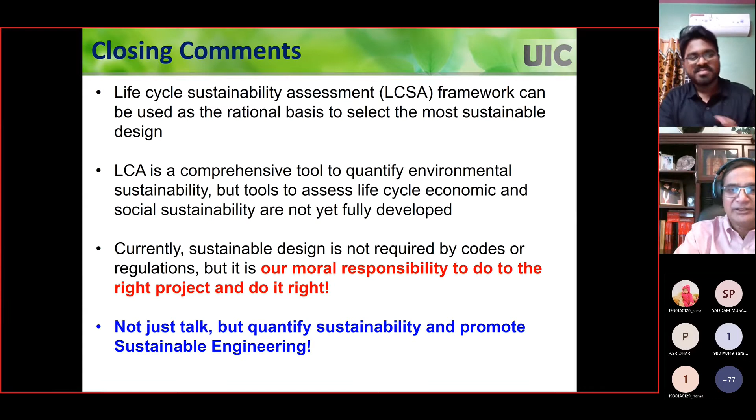So currently, I can say, sustainable design is not required by the codes or regulations, but thinking ahead about the implications of not addressing sustainability, it's a moral irresponsibility if we don't do that. So we must consider sustainable design in every project that we do. And a lot of thoughts about sustainability, right? This day was about sustainability. But let's not talk too much, but let's implement it and make the difference in the field. So sustainable engineering is extremely important.